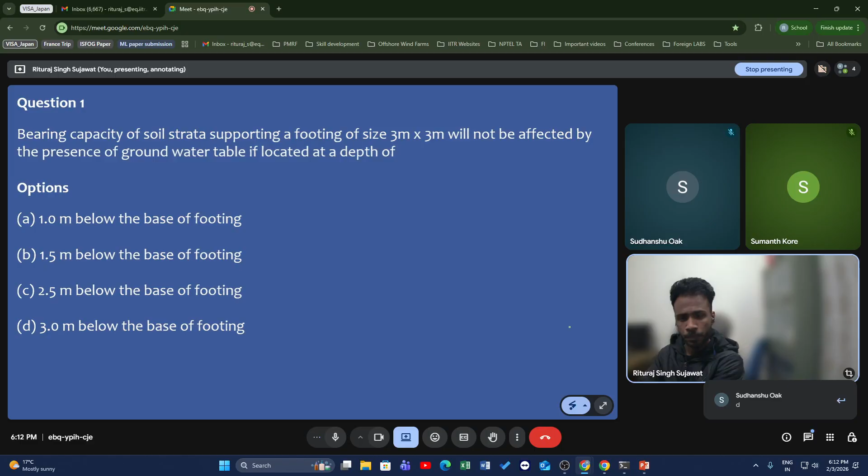Let's check the answer.

The correct answer is 3 meters below the base of the footing. So if you have a certain soil strata available with us, and this is your footing, the pressure bulbs which are assumed to be formed in this type of strata will extend up to a depth of 3 meters. So whatever width is there—in your case the footing width is 3 meters—we will assume that your pressure bulb will also be formed up to a depth of 3 meters. The correct answer is D.

So whatever is the size of the base of the footing, till that depth we can assume that your bearing capacity will get affected. After that, it won't be affected by the presence of the groundwater. If the groundwater is available up to this extent, your bearing capacity will get affected. After this depth, you won't see any change—bearing capacity won't be affected.

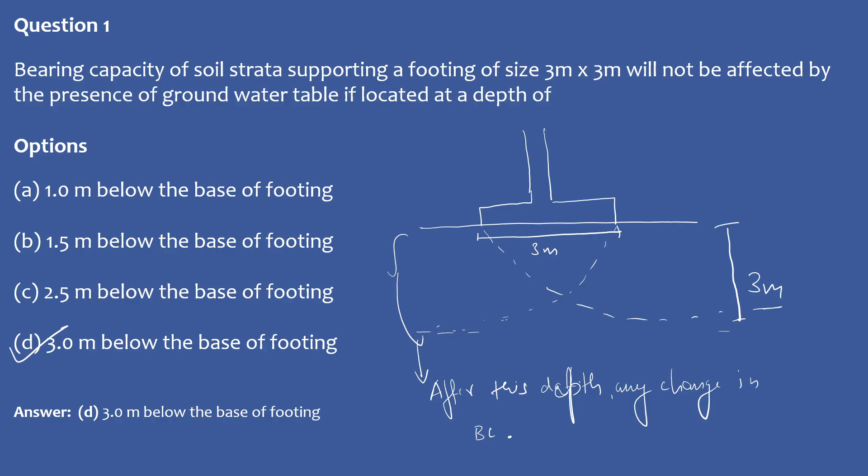Let's move to question number 2. Consider the following statements associated with local shear failure. What is the correct statement concerning local shear failure? Failure is sudden with a well-defined ultimate load, this failure occurs in highly compressible soil, or failure is preceded by large settlement. Which is the correct answer for local shear failure?

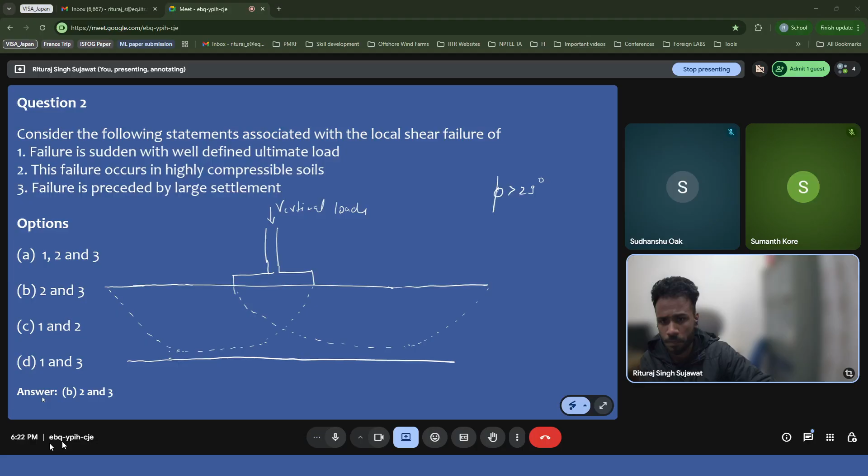And let's say then there's a certain another type of failure. One second, guys.

And in another type of case where you are having certain loose soil, in that also your slip failure will get formed, but in that particular case you'll be having slip failure lines, but these slip failure lines won't reach the surface of the ground.

So I was talking, if this is your particular footing above, and it's subject to vertical load, in case of local shear failure, the slip failure lines won't reach the surface and will stay intermediate. This usually happens for loose soils. In this case, there is no exact failure defined, so you don't know at what load the slip lines will form. It depends on soil characteristics and the orientation of the footing. But one thing is sure: this failure usually occurs in highly compressible soils, which have low shear strength, so the slip lines won't reach the surface and will stop intermediate.

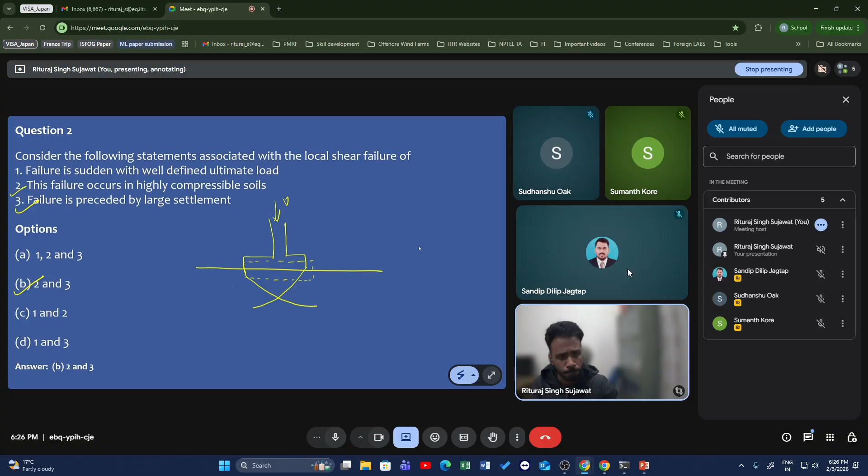Now you need to find the minimum bearing capacity of a soil under a given footing when the groundwater table is at a certain level. Among all four cases, at what level will the groundwater table affect the minimum bearing capacity?

Sir, I think the answer is option B. When the groundwater table reaches the ground surface, we have minimum bearing capacity, isn't it sir? Yeah, okay Sandip. That's a possible answer, we'll discuss this within 2 minutes. Let's allow other people also to speak. You are muted, sir. Sorry. So maybe the possible answer is Sandip's - thank you for your response. We'll look upon that, let other people also think on this, and then we'll discuss. Yeah sure sir, okay Sandip, thank you.

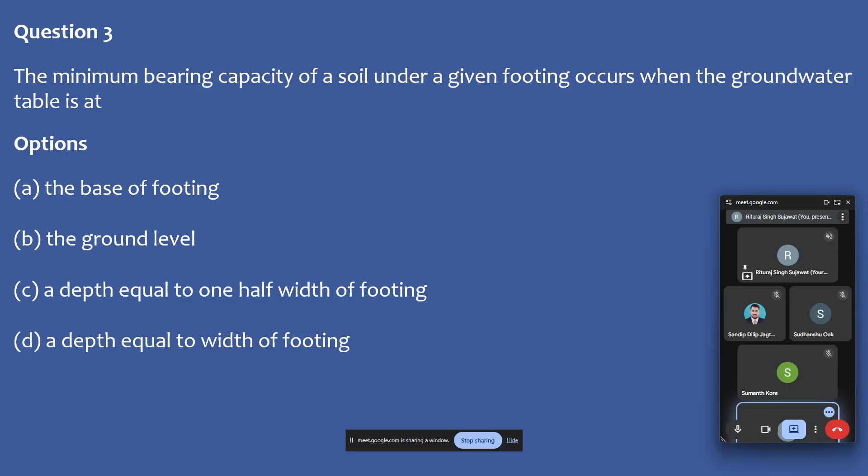Yeah, so let's look to the next question.

So usually when we derive the equation for the bearing capacity using that Terzaghi's approach, the soil wedge which usually forms below the footing - in which particular state do we consider that wedge to be? Whether it is in plastic equilibrium, whether it's in radial shear, elastic equilibrium, or linear shear.

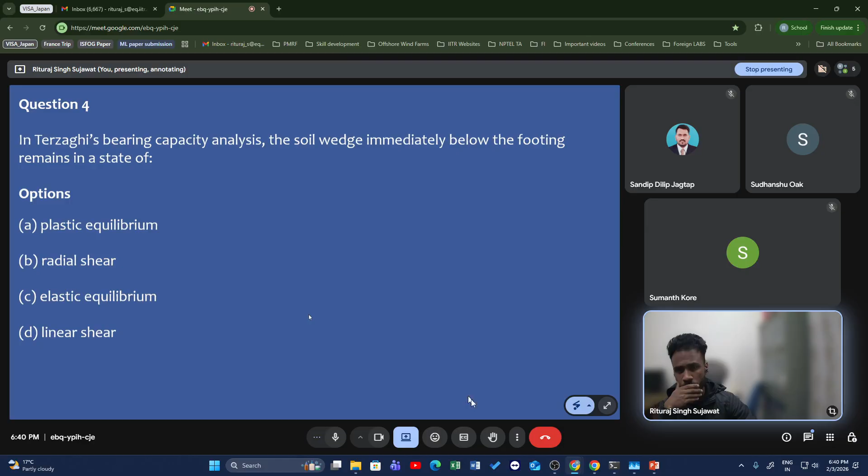So let's check the answer. The correct answer is elastic equilibrium.

And how can we say this? Because usually the wedge which forms - let's say this is your footing, and if you are applying a certain vertical load, this wedge which is getting formed below, we assume that as the elastic equilibrium.

So let's say whatever load you have applied, if it's not leading to the formation of slip lines beyond this extent, we assume that whatever load is coming to this wedge part is basically resisting the load coming from above, and it is not going into the plastic zone. So if you remove this load from the footing, the soil will again regain its shape before loading. That's why we call this scenario such that this soil formation, this wedge formation, is in elastic equilibrium.

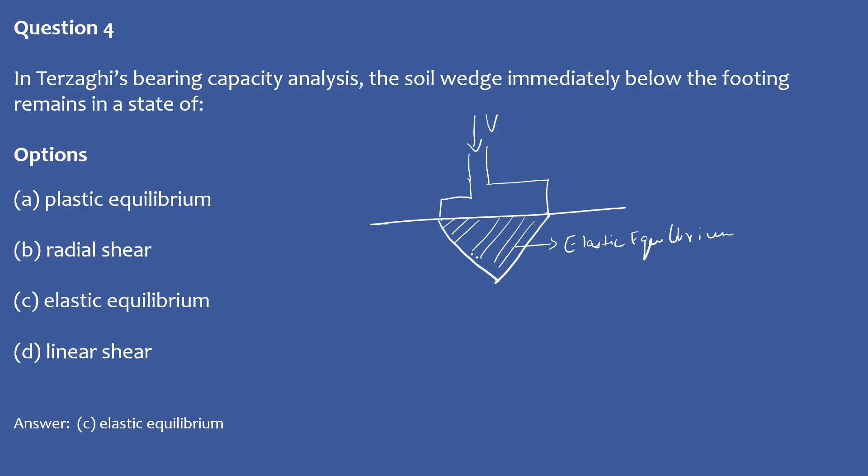Though in practical cases it's not possible to have pure elastic equilibrium, you will observe that a certain extent of the soil will go to plastic equilibrium. It's impossible to get 100% of the soil wedge to be in elastic equilibrium. But usually for deriving Terzaghi's bearing capacity equations, we assume that this particular wedge contributing to resisting the load from above is in the elastic equilibrium. So the correct answer is C, elastic equilibrium.

So let's move to the next question, question number 5. In this question, you need to evaluate what is the bearing capacity as per the Terzaghi's equation.

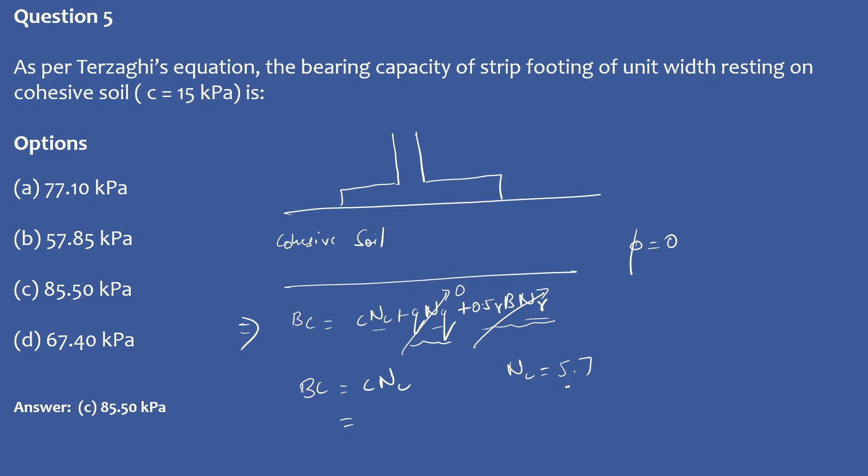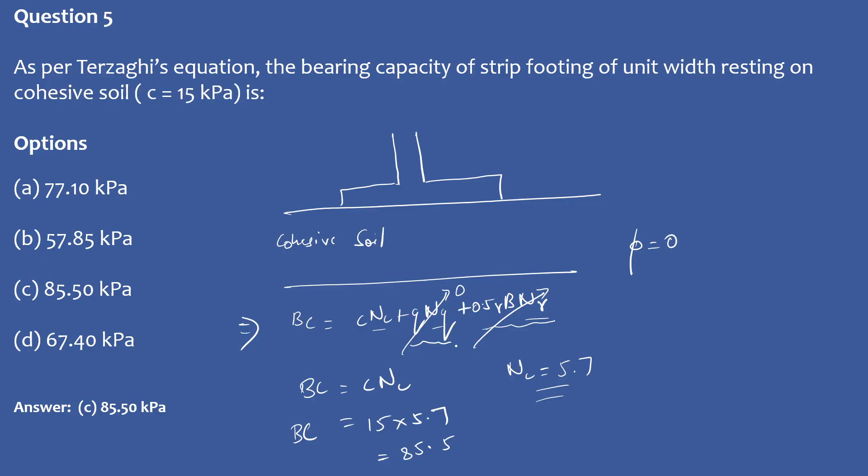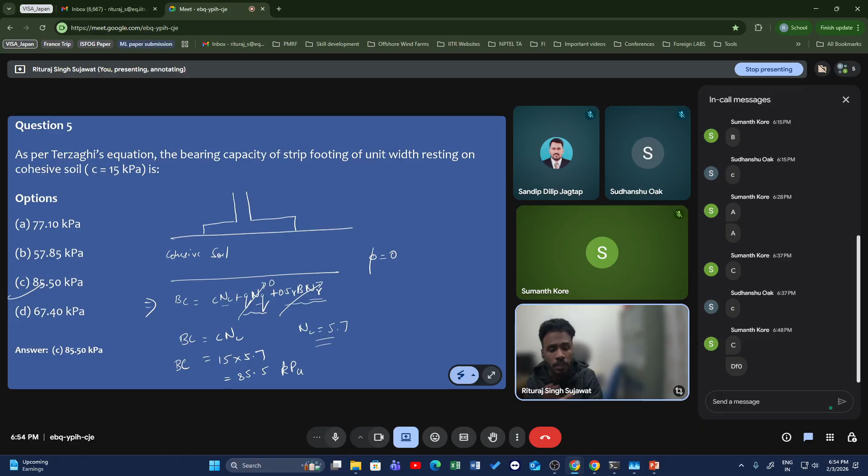So usually since your phi is 0, this term will automatically become 0, and your Q Nq will also become 0 because it's lying on the surface. So only the term remaining is C Nc. And for phi equals 0, your Nc value is 5.7. So the bearing capacity which will come out is your C, which is 15 into 5.7, that will be 85.5. Let me check - 5.7 into 15, yeah, it's 85.5. So the correct answer is option C, 85.5 kPa. It was straightforward because both other factors in the bearing capacity cancelled out, so the final remaining answer is C Nc, and you just plug in the values. For phi equals 0, remember your Nc value is 5.7. So your bearing capacity is 15 into 5.7, 85.5 kPa.

Moving to question number 6, you need to consider the following statements and mark which is the correct statement among both of them.

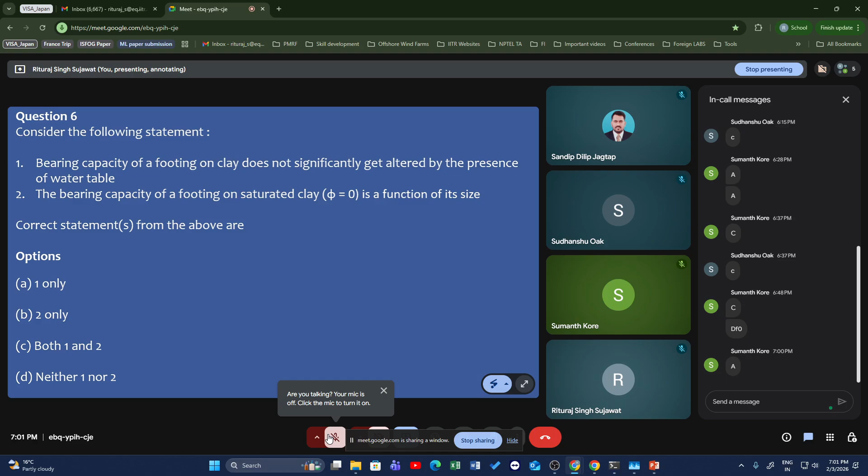So guys, any answer? We do have some answers from our learners - it's D, it's A. So it was from previous. Let's check the answer. So correct answer is D.

Neither one nor two. So let's look at the statements, both of them one by one. The first statement is: the bearing capacity of a footing on clay does not significantly get altered by the presence of water table. This is not correct because your water ultimately affects your bearing capacity.

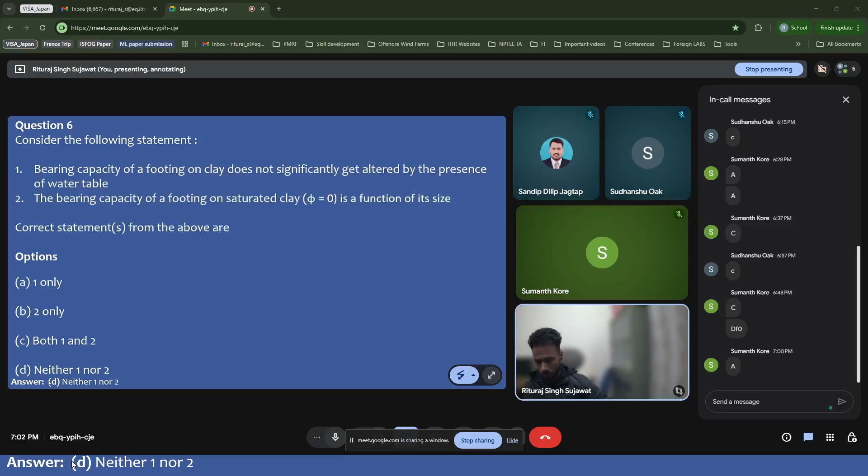Sorry. Give me a sec.

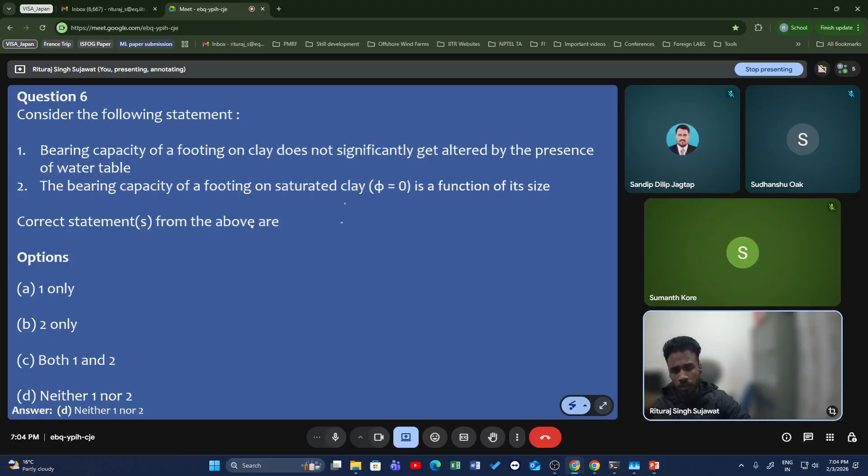So it's visible now. The correct answer is D, neither one nor two, because as you know the bearing capacity formula is given by C Nc plus Q Nq plus 0.5 gamma B Ngamma. So let's say when your water table will be there, both this factor as well as 0.5 gamma B Ngamma - this gamma will get changed and this Q will get changed due to the availability of the water table. And by physics also, if you see, the availability of water will affect your effective stress, and the effective stress leads to reduction in the shear strength, and thus it will lead to reduction in the bearing capacity. So this statement is wrong.

Again, the second statement: the bearing capacity of a footing on saturated clay is a function of the size. So as we have seen, when your footing is resting on the surface, this factor will get 0. And since it's not on the surface, but yeah, it's mentioned it's on the saturated clay, so we are assuming phi will be 0, so this factor will automatically get 0.

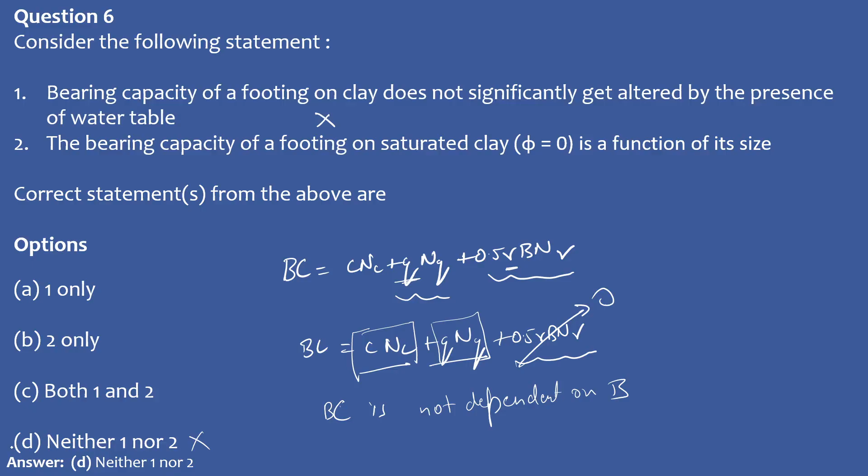Any doubt in this, guys? Okay, let's move to the next question.

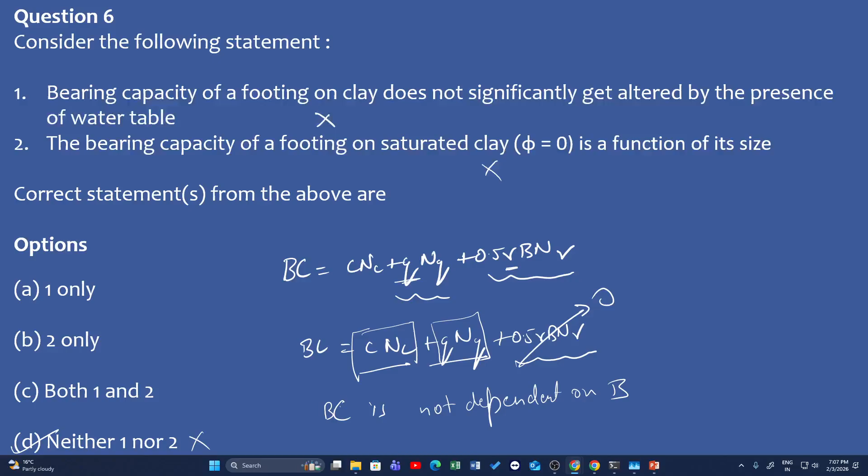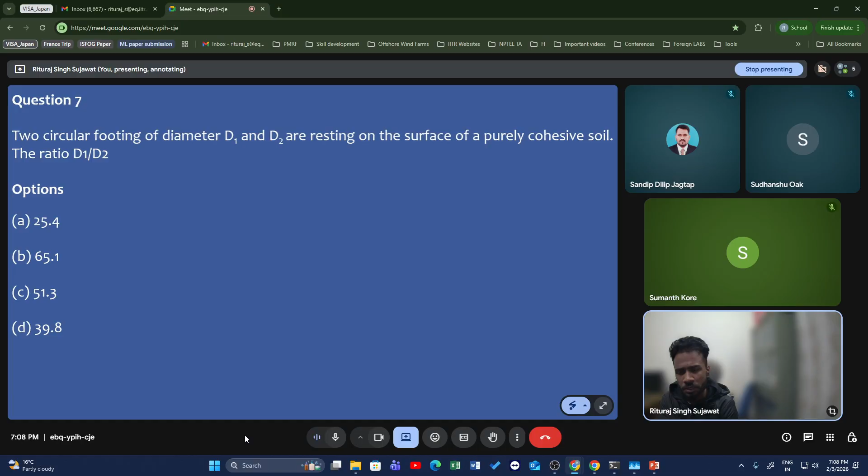You are having two circular footings of diameter d1 and d2, resting on the surface of a pure cohesive soil. What is the ratio of d1 and d2? I think the question is incomplete here. Two circular footings, diameter d1 and d2 - there must be some relation with the diameter given, but I think they have not given this relation. So I think we can skip this question.

But if you want to check this particular part - two circular footings resting on the surface of purely cohesive soil. So when we are talking about purely cohesive soil, the only parameter which will contribute is C, and since they are resting on the surface, C will be the only contributing parameter. But yeah, this question is bit incomplete, so they must have given some condition, so we can skip this.

We can go on this. So how do you define the sensitivity of the soil? For that you need to be aware with the definition of the sensitivity of the soil.

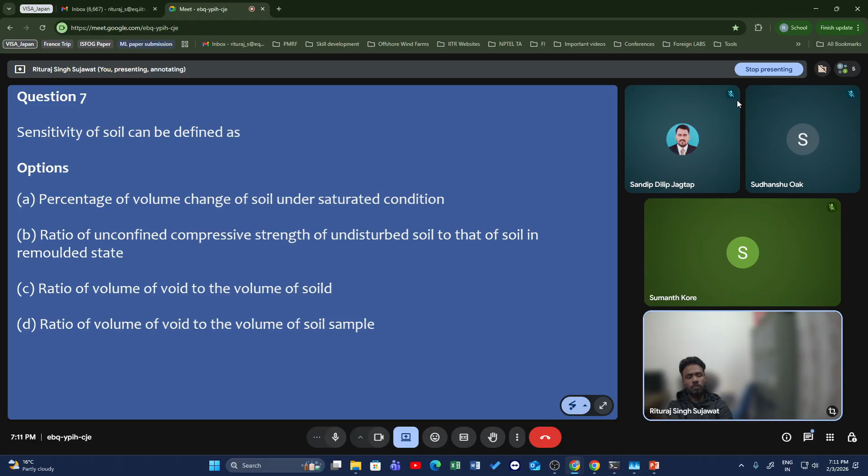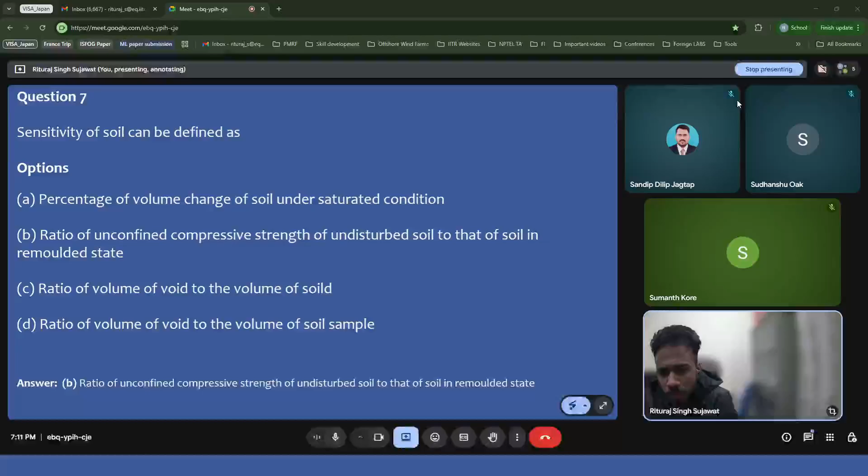Let's check the answer for this. It's basically the ratio of the unconfined compressive strength of the undisturbed soil to that of the soil in the remolded state. So the answers are correct, the correct answer is option B.

Usually sensitivity basically refers to how much strength is available when your soil is undisturbed, and when the soil gets disturbed - let's say when you take the core out, or change the initial state of the soil in which it was available in the ground - there is a change in the strength. How much strength gets changed is defined with the help of the sensitivity. And when we are talking about the strength, we are basically talking about the unconfined compressive strength.

For that you need to perform the unconfined compressive test of the soil, where you won't be having any lateral support to your soil core, and at that level whatever compressive force you apply, there will be a certain failure of your soil mold, and this basically leads to a certain level of strength which we know as the unconfined compressive strength of the soil. So the correct answer is option B.

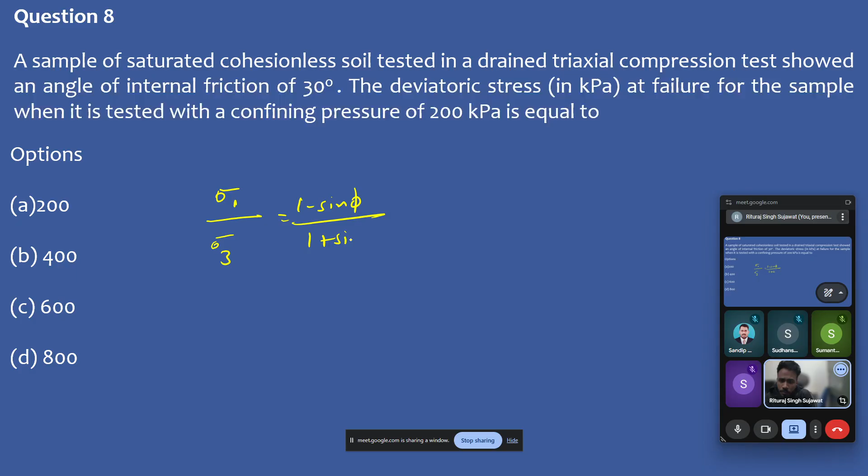So the characteristic when it's tested - usually the ratio is given by sigma 1 by sigma 3 equals 1 minus sine phi by 1 plus sine phi. Whenever you are having a certain soil mold, you apply a normal load and you have the confining pressure. This sigma 1 is known as the normal force which you are applying, normal stress, and this is your confining stress, denoted by sigma 1, sigma 3.

So you have been given sigma 3 which is 200 kPa, and you have been given the internal friction angle, so 1 minus sine 30, 1 plus sine 30, multiplied with your sigma 3. So sigma 1 is none other than 1 by 3 into sigma 3... sorry, let me recompute: 1 minus sine 30 is 1 minus 1 by 2, and 1 plus sine 30 is 1 plus 1 by 2. So you get sigma 1 in terms of sigma 3 - it's 1 by 2 over 3 by 2. Oh sorry, 1 plus sine phi by 1 minus sine phi, I have written this in the wrong form.

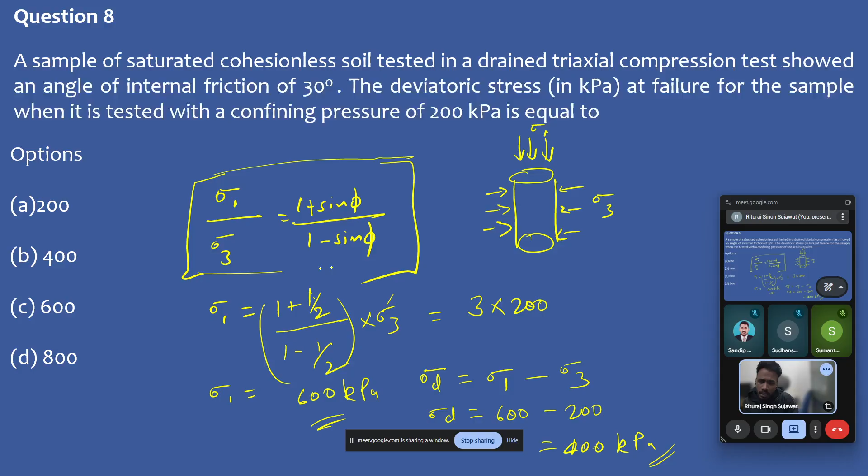So sigma 1 is your 600 kPa. And when you are calculating the sigma deviatoric, sigma deviatoric is none other than your sigma 1 minus sigma 3, and sigma deviatoric is given by 600 minus sigma 3 which is given by 200. So here the correct answer is 400 kPa. You just need to catch on to this formula and then you can calculate. So the correct answer is option B, 400 kPa.

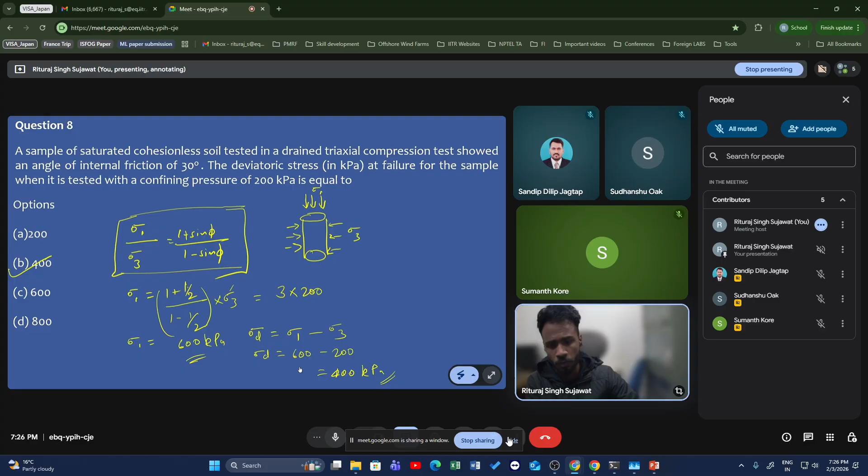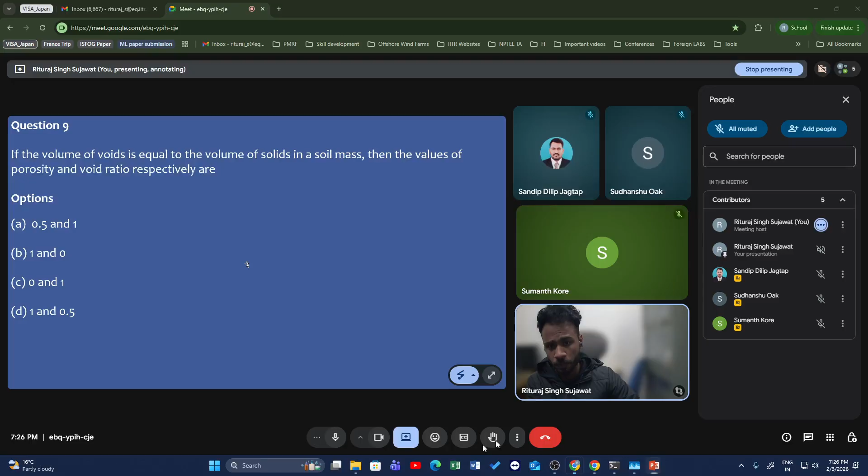Moving to next question. Question number 9. In this particular question, you have been asked, let's say if you have a volume of voids which is equal to the volume of the solids in the soil mass, then find the values of the porosity and the void ratio respectively.

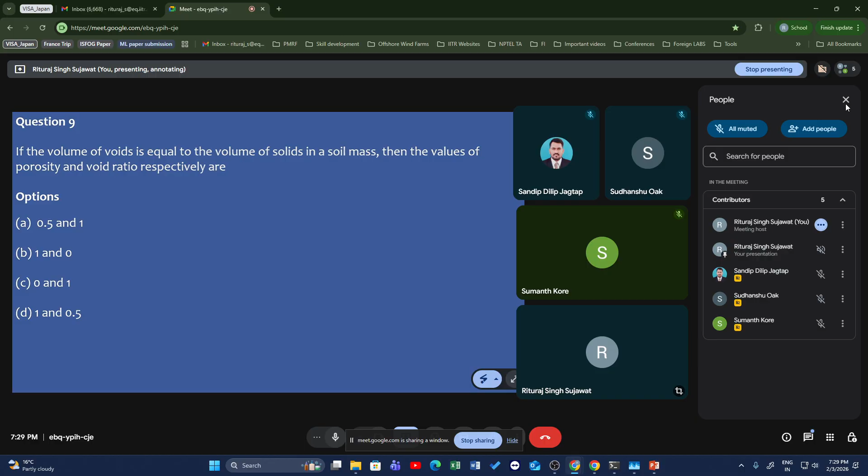Yeah, so let's check the answer. In this, you just need to know the formula of the void ratio and the porosity. So your void ratio is given by volume of voids to the volume of solids, while your porosity is given by volume of voids to total volume.

So it has been given that volume of void is equal to the volume of the solids. So definitely your Vv by Vs is equal to 1, and in this case volume of voids by total volume, the total volume will consist of volume of voids plus volume of solids. So both quantities are same, so this is 2 times the volume of void, so it's basically your 1 by 2. So your porosity is 0.5 while your void ratio is 1. So the correct answer is A, 0.5 and 1.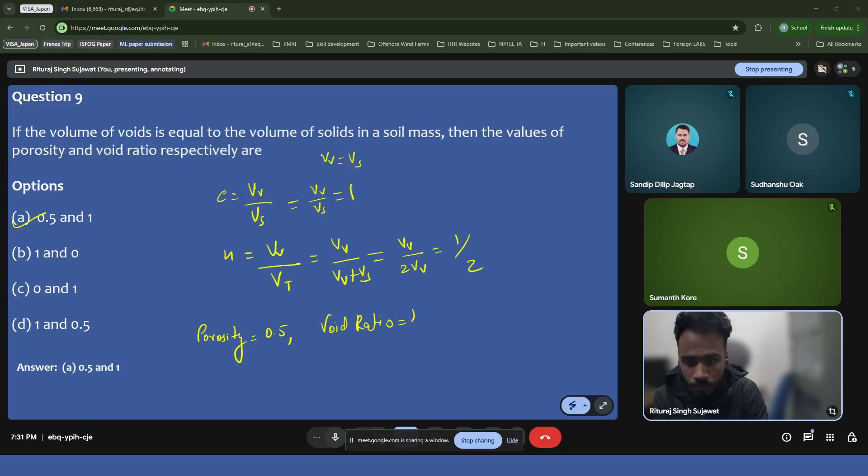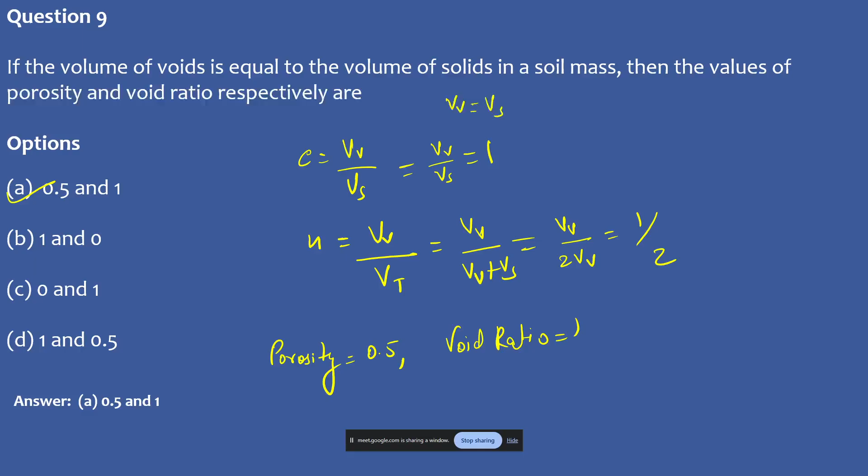Moving to question number 10. For straightforward questions, you just need to know the formulas. If the time required for 50% consolidation of a sample of clay with single drainage is 24 hours, then find the time required to consolidate the same sample of clay with the same degree of consolidation but with double drainage. In one case you have single drainage, and in another case double drainage, so how much time variation will there be for the 50% consolidation?

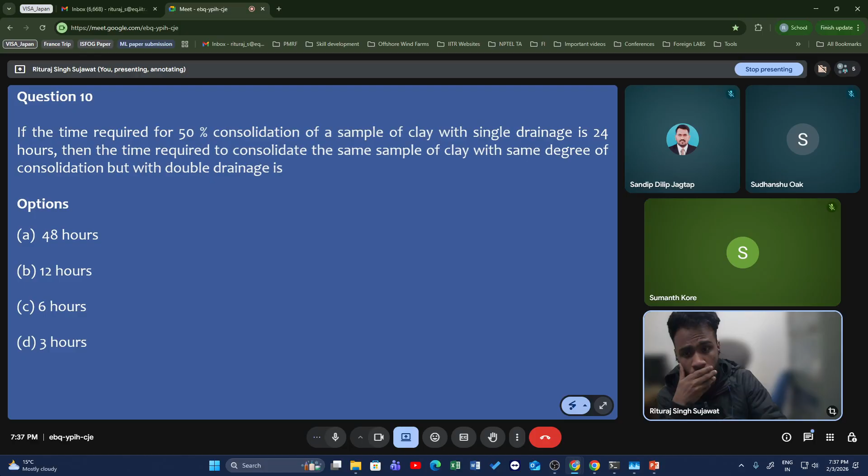Okay guys, so let's check the answer. The correct answer is option C. If you recall the formula, the time required for drainage with consolidation is given by T = Cv*t / H square, where H is the total length of your drainage path and T is your time factor. You can see that the time factor is directly proportional to your degree of consolidation, so your degree of consolidation is directly proportional to H square. With single drainage, in one case you have drainage path as H, and in another case you have H by 2.

Since U is directly proportional to H square, and T is proportional to 1 by H square, that means T1 H1 square equals T2 H2 square. So if I compare T1 by T2, it's H2 square by H1 square.

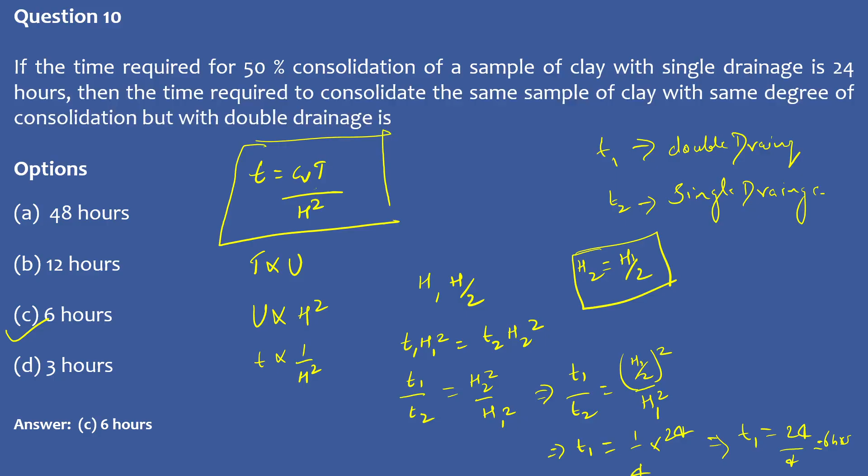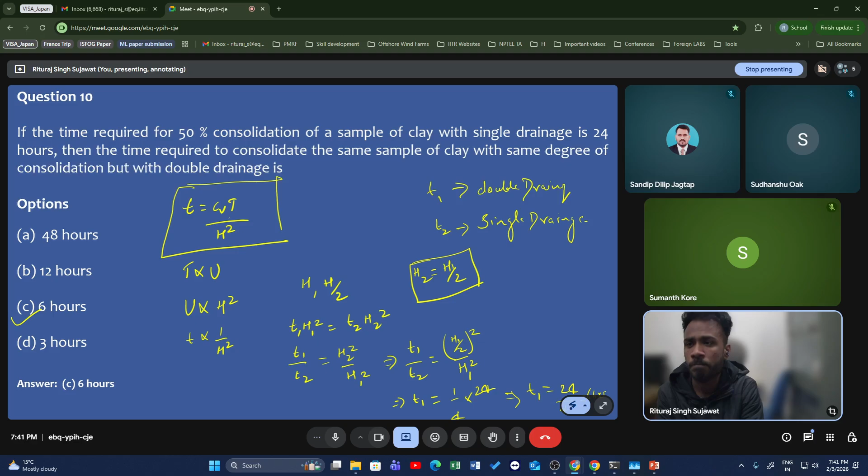Moving to question number 11, it's a theoretical question, a preliminary one we study in geology as well as geotechnical engineering. You need to answer for this soil deposit which is formed by wind. Soil formation takes place by breaking down of rocks or other geological material formed by lava or tectonic activities. One case is where soil deposit is formed by wind. So what type of soil deposit is it among these four?